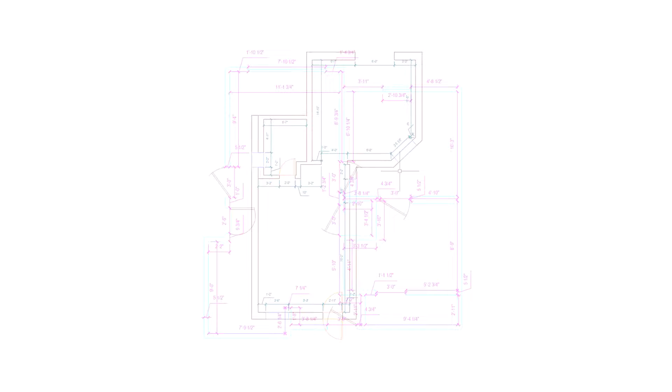Well, for those of you who didn't stick around, Class 8 started out as kind of a mess, with the web being down and me having to go back home for the lecture notes. But we persevered, had a pin-up of assignment 1, and then an abbreviated version of the general topic I was intending to cover, combining things in AutoCAD, followed by a discussion of the objects for assignment 2 and some methods for measuring them.

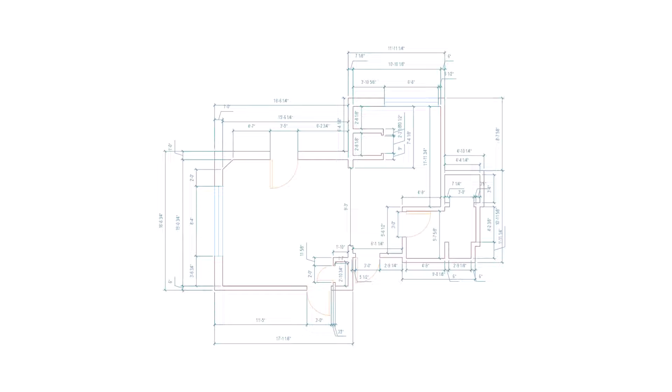First of all, I was truly impressed with everyone's work on the apartment assignment. For what are essentially your very first CAD drawings, these are just great. And my hat is off to Becky and all the hand drafting you guys did for her last year. It shows. In class on Monday, we pinned up both the measured sketches and the resulting CAD drawings in the interest of seeing what we can learn from each other's ways of doing things.

Please don't take my comments in what follows as negative criticism, but as positive suggestions to make the whole measuring, sketching, drafting process even more useful, since you will probably be doing a lot of it in the years to come. To start on a positive note, Katie took the time to label her sketch, which I should have made part of the assignment to be part of your standard operating procedure. In all the professional offices I have worked in, everything to do with a project is kept in a project binder from day one through completion.

And other members of a design team might be consulting your sketches weeks or months later, so it's always good to have your name on them in case people have questions later on, as well as the date, since things might change over the course of a project.

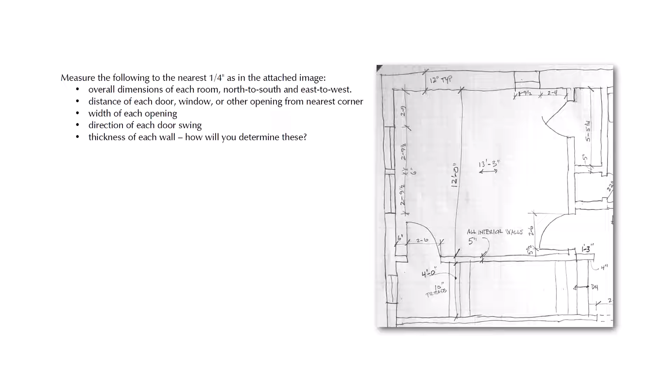As people preparing for a profession, we need what we do to be accurate. You don't want the nurse preparing your injection to mutter, 'Oh heck, that's close enough.' I had asked for dimensional accuracy to the nearest quarter inch, but noted a number of sketches that rounded everything off to the nearest full inch. I can safely say rounded off because I know that not everything in these rooms is built to an integer number of inches. When I see that someone has taken the time to deal with quarter inches, I have more confidence in the whole drawing.

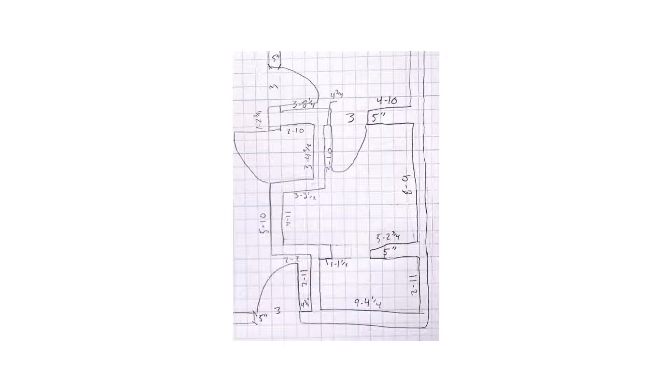Sometimes the fractions really do matter. I'd also ask you to be sure to measure the overall length and width of each room, north to south, east to west, because adding up a lot of individual measurements can introduce a cumulative rounding error. Before I got my laser rangefinder, I'd hook the end of a tape measure under a light switch cover or behind a baseboard or the like to be able to stretch a tape across a room in one go.

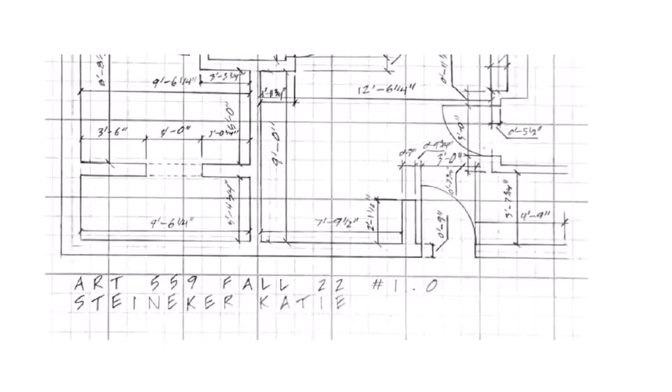Let me approach the delicate topic of tidiness with regards to architectural documentation. We aren't doing life drawing sketches here, where multiple lines might be used to suggest a particular type of contour. These are measured drawings of a built environment, and each line you make represents not only a thing, but a decision about that thing. This is here. To use this sketch again, what and where things are is very clear.

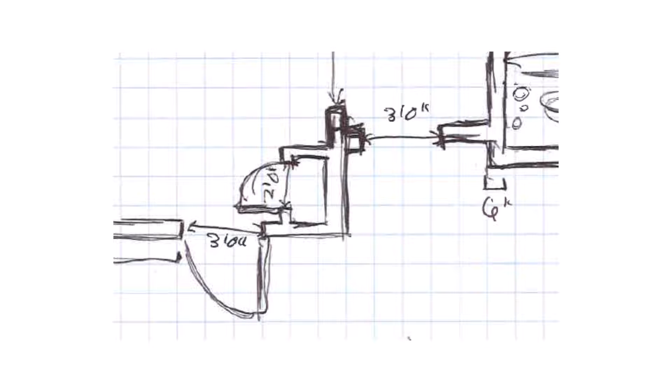By contrast, several of the sketch drawings took a more painterly approach, whose main problem, I think, is that all the extra lines end up obscuring detail, where detail is what we are trying to provide. I suggest we heed a general rule proposed by the graphic designer and educator Edward Tufte: try to present the most information with the least amount of ink.

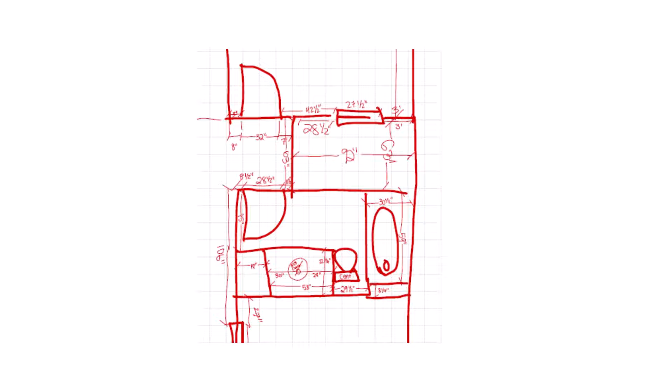The flip side of providing more lines than needed is not providing enough information, especially about the thickness of walls in these sketches. An important consideration because things happen inside walls that we need to be aware of, like ducts and chimneys and plumbing stacks. Not including both sides of a wall also makes it hard to tell which side a given dimension applies to.

There are a number of different ways to combine things in AutoCAD. We're making blocks, which is like a bunch of discrete lines and stuff that are all lumped together and move as one piece. But there are a couple of other ways to do that that might be more useful for different purposes. We looked a little bit at polylines, and I want to show you a bit more, because they have some capabilities that your regular line types do not have, which is they can vary in width.

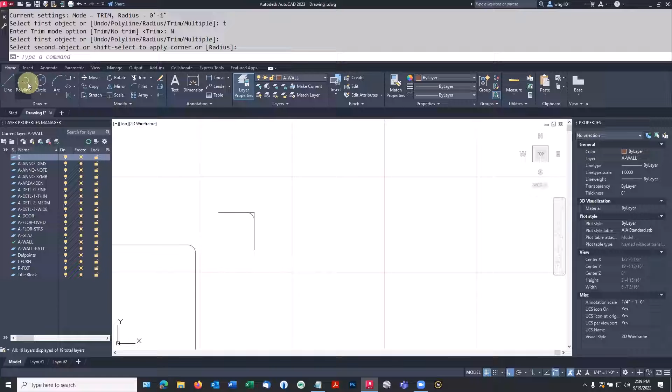So let's review just what a polyline is. We'll go to polyline, and it can either be a series of straight lines, and then that's one thing.

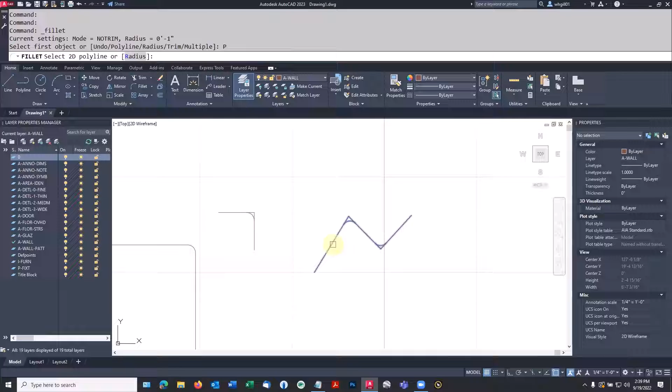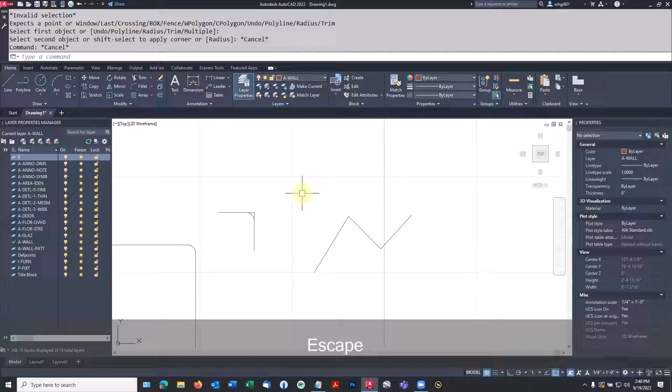Since we were talking about fillet earlier, you can fillet a whole polyline at one time if you want. Pick the fillet command, and one of the fillet command's options is polyline, and our radius is set for 1, then we just pick that. Let's set the trim mode off, fillet, T for trim, N for don't trim it, then P for polyline. Isn't this fun? And then, isn't this an object? Mode is trim, radius is 1, P for polyline, select a 2D polyline, and there it is. Okay.

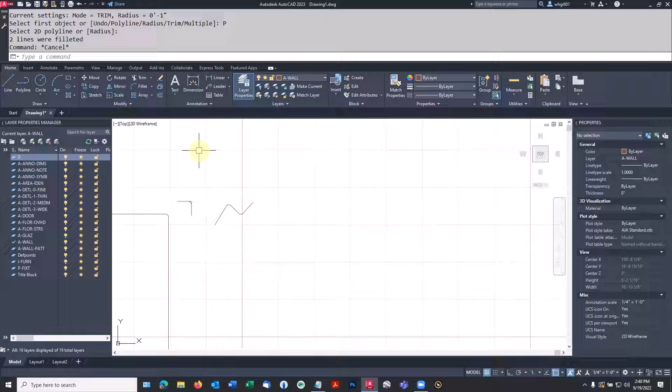You know, if you've roughed out a rectangular swimming pool and you want to round them all off by 4 feet or something, actually, let's just do that because that's something else nice about polylines. PL is the same for polyline.

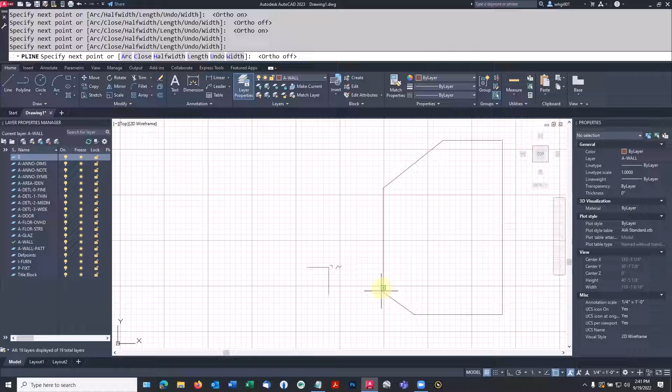Polylines also, when you're drawing them and you get sort of near the end, you don't actually have to bring this up. You can snap to that, or you can just type C for close and it closes itself, finishes that up. So fillet,

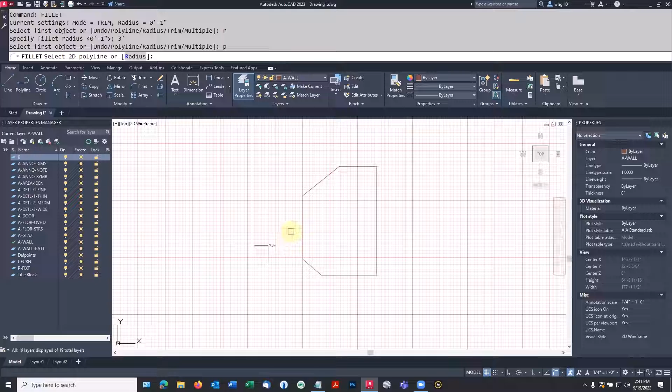Let's set the radius to 3 feet. Set the polyline option and then pick it. So it does them all at 3 feet.

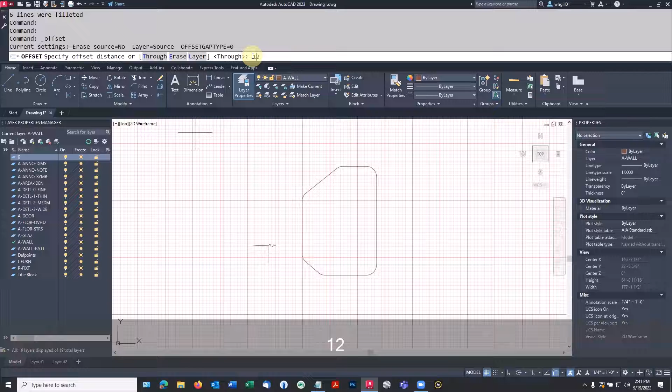Now imagine this was your pool and you need to do, you've got that tile that's 8 inches all the way around it. You can offset a whole polyline at once instead of doing it piece by piece. So if I go to offset distance, that's what it's asking for right here. We'll say a foot. And then you get to choose whether it's to the inside or to the outside, and I'll say to the outside. So instead of having to go pick new fillets and new radiuses and all that kind of stuff, you just do that all at one time.

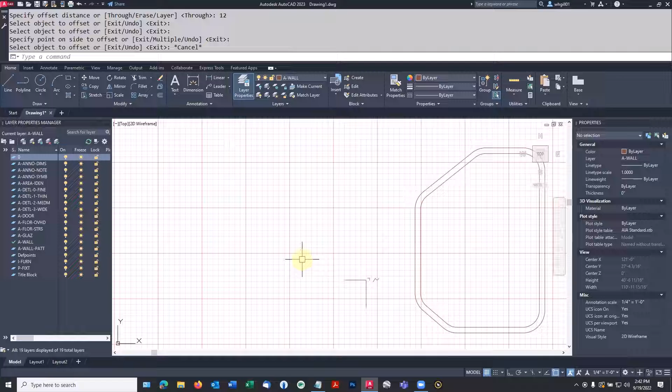So another cool thing about polylines, lines on the screen, just lines, are always going to be this skinny thing. No matter how much you zoom in on them, they're just always the same thickness.

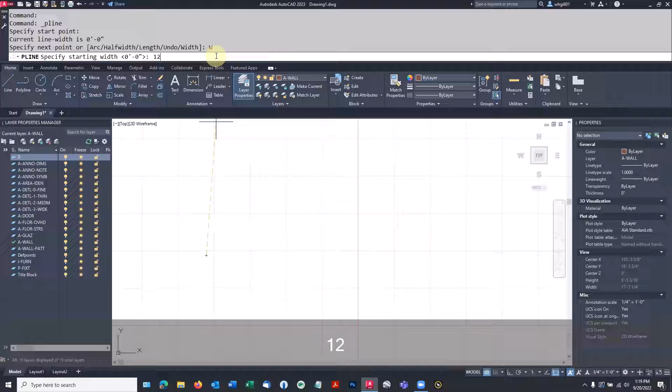Polylines, and this gets into more of a graphic design sort of a deal, each line or arc segment of a polyline can have its own width as well. We'll make this one have a uniform width of 12 inches. And that'll plot that width, and it's good for title block edges and that kind of stuff that you don't want to have to set up a whole new layer with a width for it. It's just going to plot that way.

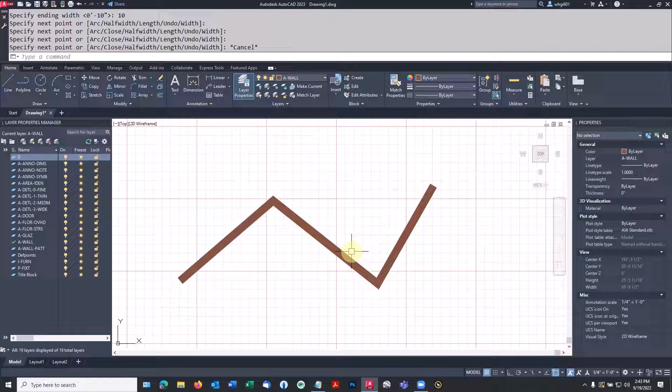Polyline segments can also vary in width as they go. So polyline, I'll make my width be, let's make it wider, let's make it be 20 to start with, and 10 to end with. So now I get something like that going on.

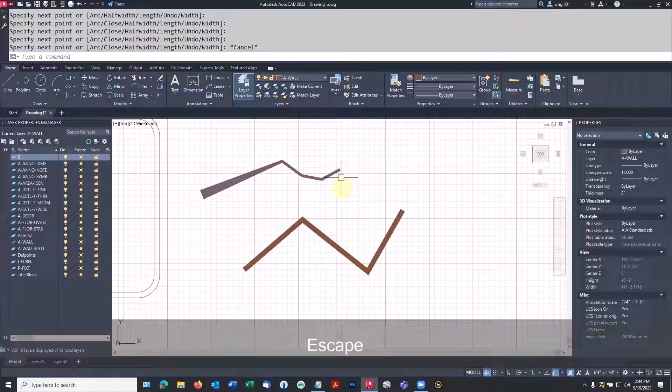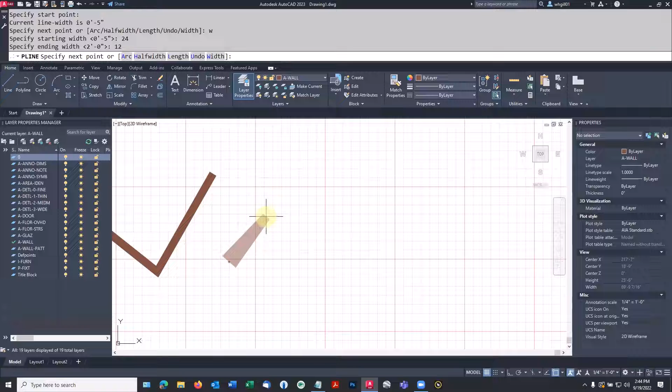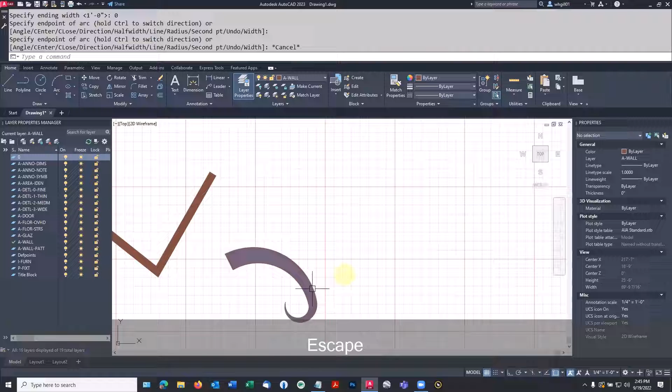And if you combine this with straight line segments and curved line segments, you could do PL. Let's do width. I'm going to make the width be 24 and the ending width be 12. And I'm going to draw an arc with that, A for arc. 24 to 12. And then the next little piece of arc, I'm going to make its width start at 12 and end at 0. So we get a little guy like that going on. So there's options there that you can do with one object that otherwise you might have to draw some perimeters and then apply a hatch to the inside.

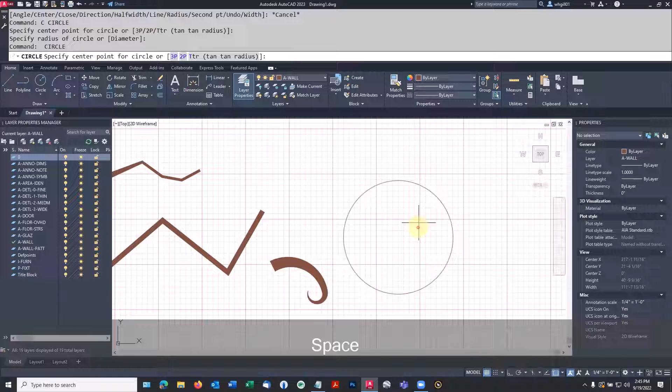So polylines, a couple of ways here to create polylines that I've listed. I'm going to skip most of those, except for some reason you would like to keep all these guys, but also have the polyline that shows that interior space. That's the boundary or bpoly command. BO is the shortcut. Okay.

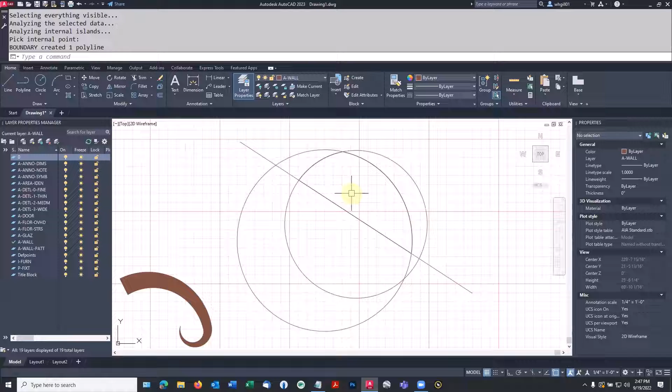And sometimes it's hard to pick something you've just created. If I'm going over here, it might be picking one of these circles instead. But if you remember from when we were talking about selecting things, you can always select the most recently created thing, the last thing made, by typing L for last when it asks you to select something. So you can do move, and then L for last, enter. I'm done with those.

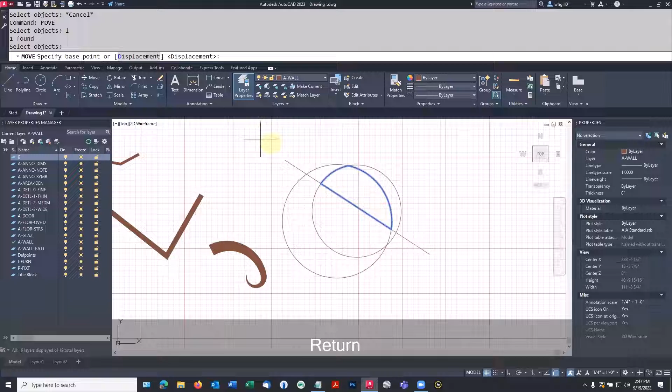And then that comes all by itself without having to trim those down or anything like that.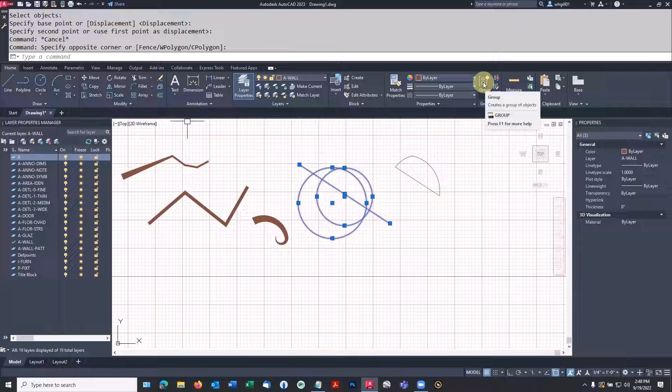The next way to combine things together, usually on a temporary basis, is called groups. Let's say I wanted these three things right here to always just move around together. It's just a design element, not anything I want to save to put in another drawing. We can select them ahead of time and then do Group over here. I'm not sure where it is on the Mac, but the command is Group. Now these guys travel as one, and they copy as one.

Unlike blocks, which when you modify one version of one, they all update, which is very handy, groups are made so that you can move things around inside them. If these were chairs around a table and you wanted to vary them a little bit, over here in group...

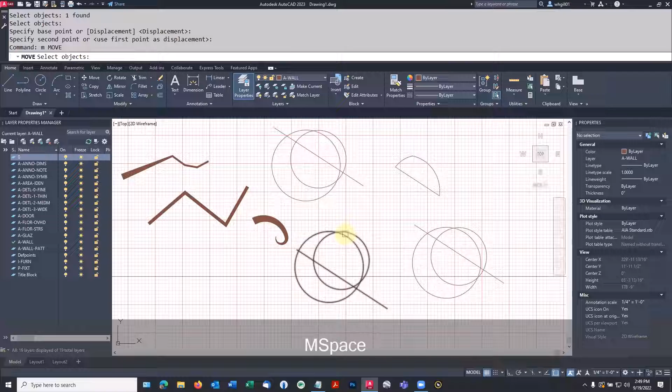Right now, if I pick this group, the whole thing moves. If we turn that off, group selection on or off, so that it's not highlighted, then we can move an individual object around. And then if we turn group selection back on, then they can move together again. It's a slightly different way to address dealing with multiple things that you don't want to have to pick each time. There might be 40 of them. You just make them a group and move them all at once.

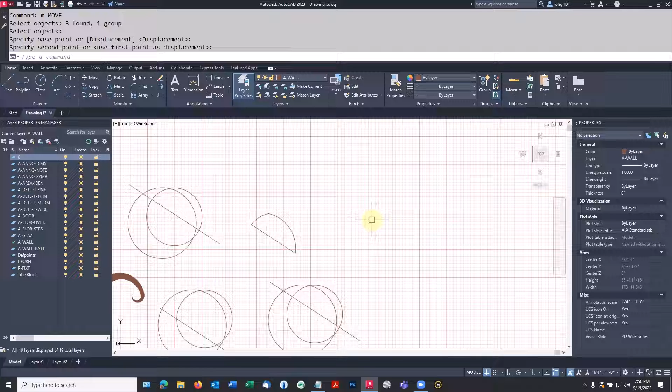The basic process for creating blocks is just not that big a deal. Here's what we do. I'm going to make some simple shape, and I'm going to call this a planter or something like that.

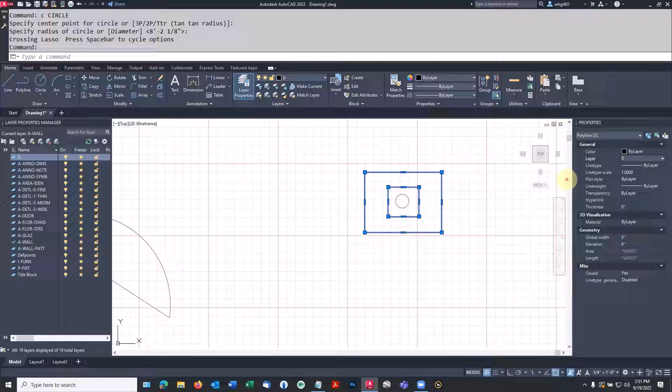These are objects that I've drawn. I'm going to put them all on layer 0 - we'll get to that later on, but it's good operating procedure to put anything that you want on a block in layer 0 before you turn it into a block. What we're going to do is take these three objects, store them as one with a name, so we can recall it by name when we're putting it into our drawing. We can save it out as a separate drawing file and insert it into other CAD drawings. It could be an airplane, it could be an atom, doesn't matter how big it is.

So a couple of decisions we need to make: we need to give it a name, which I'm going to call planter. We need to give what's called its insertion point - as we're moving this around, dragging around the screen to place it, do we want the cursor to be here? That's one insertion point. It could be here, or here. What makes sense? The important thing is that it's not arbitrary and not off in space somewhere. Let's pick the center of the circle, assuming they're all lined up.

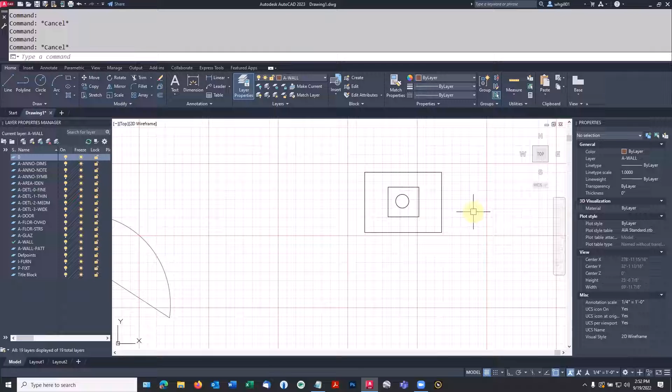So to create a block, you type the word block. It's the easiest way. The first thing, we've got to give it a name. Blocks are named things. When we save it out to a drawing, if we call this planter, we'll have a new file called planter.dwg.

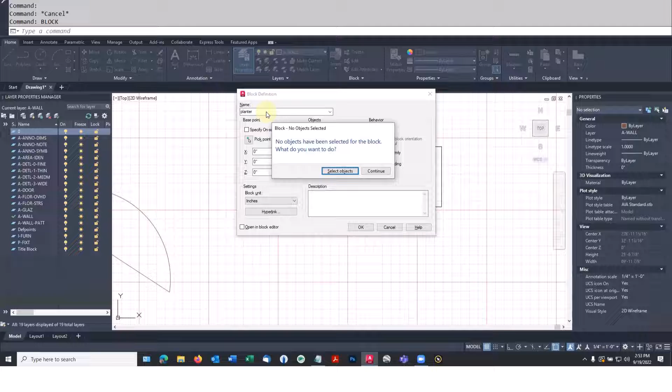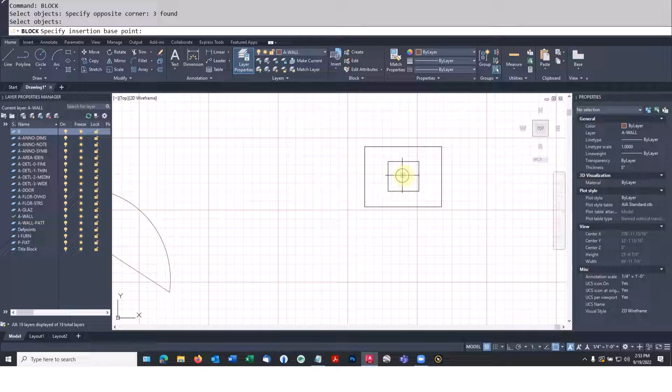And then it'll say select the objects, if you haven't already. I'll just put my box around those - I could be picking other stuff, but I have to hit enter to let AutoCAD know I'm done with that. Then I'm going to pick the point I want our insertion point to be - it's called the base point of the block. I'll snap to the center of that circle. I've got my center snaps turned on. So there's my center, and I think that's all we really need to do.

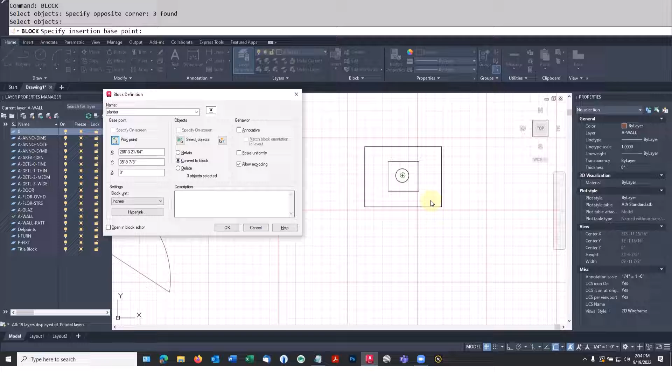One little last question is, do I want to take these guys right here, the ones drawn on the screen, and convert them into a block while I'm doing it? I'll say yes, and we say okay. So there this is - it's a block reference, and its name is planter down here.

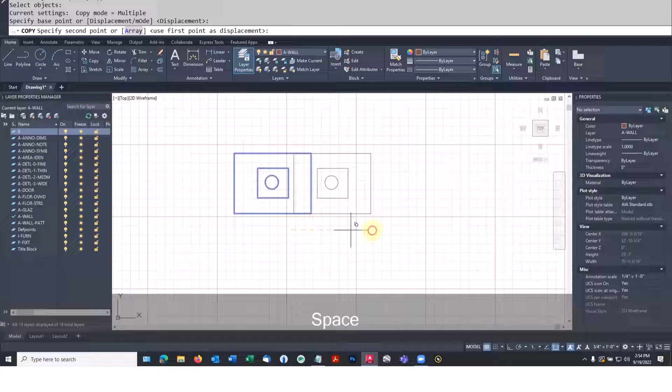So we can put those in an array, or copy them, or something like that. A lot of times with something that's going to be a standard element, you start out with a fairly simple version of it, and then as the drawing refines, you maybe do it in more detail - maybe add text, maybe add some more line work.

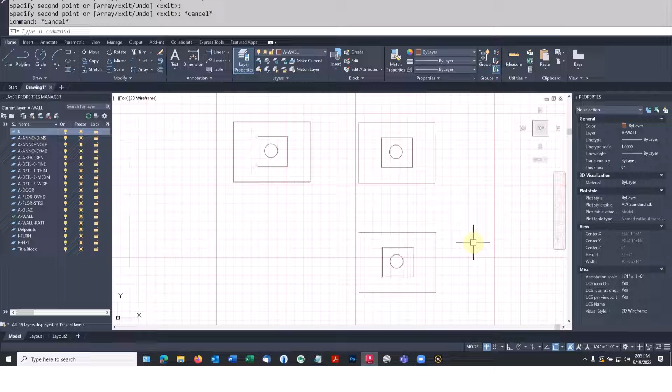So this is over on page 3. A couple of ways to redefine a block - editing blocks, actually this is on page 4. The easiest way to do it is to select one of them, right-click, and go to Block Editor. This is its own little mini editor where we won't see the other stuff. And there it is - so this is like our block, and I'm just going to add some lines.

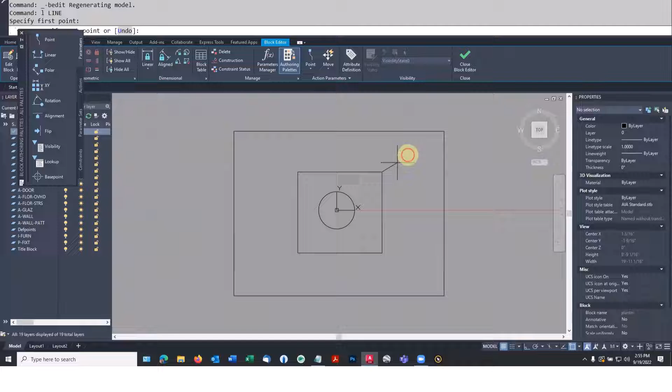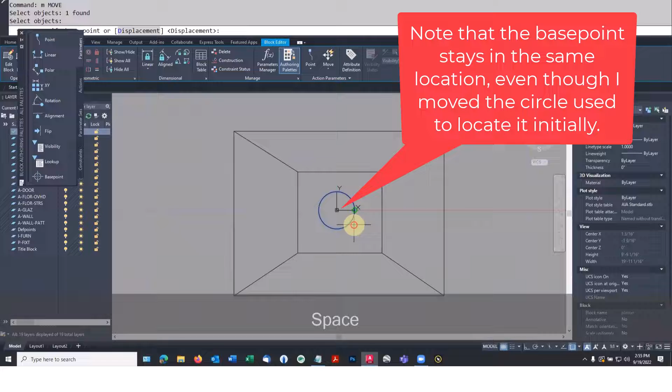And I'm going to move this circle down here. And then when I'm done, I just check the green check mark. Okay, close block editor, save the changes to planter. All those instances of the block have been changed. There's just one definition for planter in any one drawing.

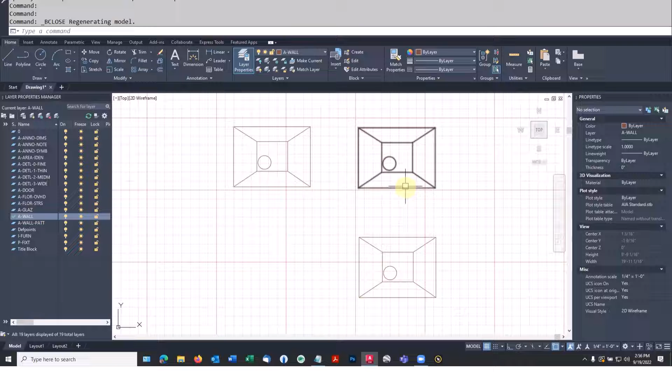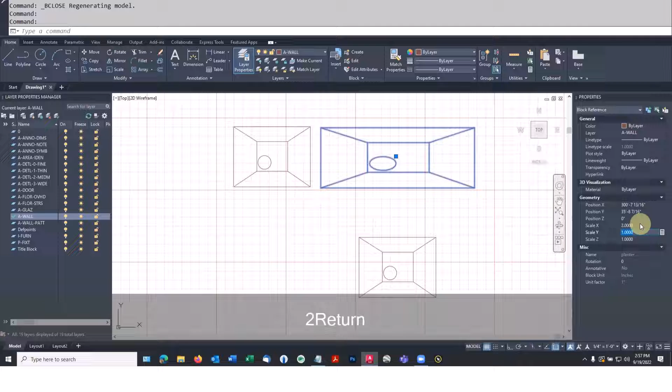Let's say we need a long planter and a short planter. Any individual instance of a block can have different scaling factors in the X and Y direction. So if we want to make this twice as long, this is the X direction going this way, as you can see down here. Double the length we get, I'm just going to say, make the X factor be 2. So you notice the insertion point stayed in the right place, it expanded around that point. It also turned our circle into an ellipse as that stretched, which might or might not be appropriate to your use.

If you wanted to keep doing this a lot, maybe you just make these guys a group instead, copy them from place to place, and then stretch one end, leaving the circle as a circle in its current location. So that's one of the drawbacks of blocks, is that when you scale them, everything in them scales the same amount.

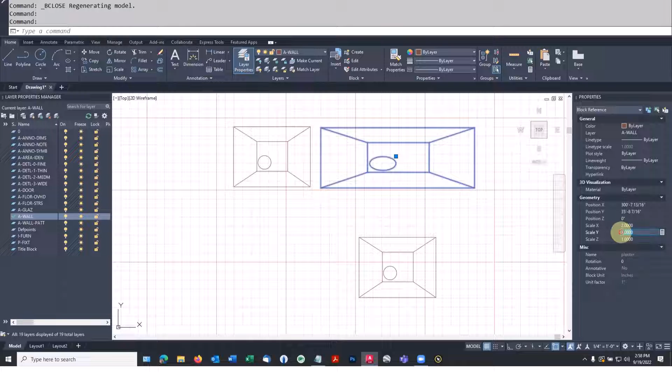If we take this back up to make the Y also be 2, then we get something that's twice as big and back to being a circle again. So some blocks are made to be stretched.

Others, and I picked the example of like a range that has a very fixed size. You don't want to be increasing that by an inch. It's not going to fit into the slot. A football field, that's a fixed size.

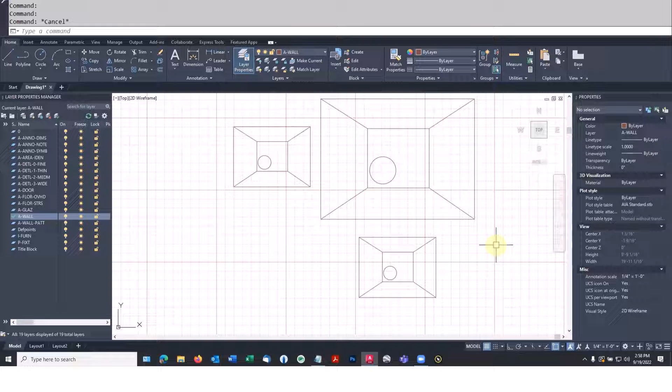Some, however, are made to be scaled. A case in point might be where we make a door, a little teeny tiny door that's 1 inch by 1 inch, and this is maybe a 32nd of an inch wide, something like that. Then we can place that. And if we want a 36-inch door, we just change the scaling factors to 36 and 36, and it's automatically the right size. So 1 block instead of 1 for each door size.

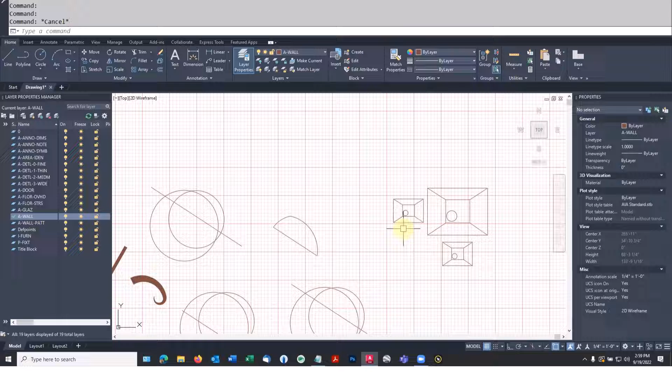We can also, worst comes to worst, explode a block. Let's say I want this one to be—I want to keep the height the same, the circle in the same place, still be a circle, but I would like to have this be much longer this way. I just basically want to stretch this end of it down a ways. But blocks can't be stretched.

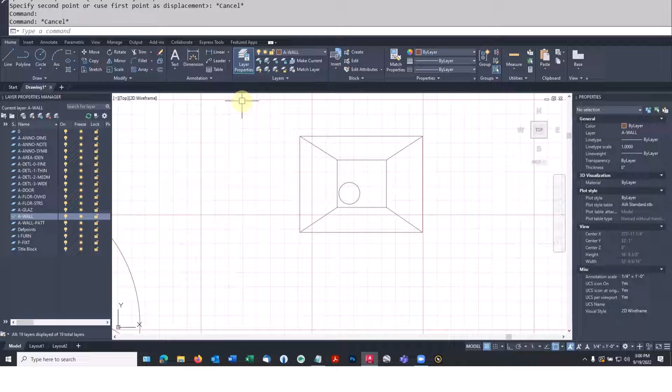So for this, we need to explode that block back into its component pieces, which is this tool right here. You can type explode, or just pick it, hit enter, hit enter. You're out, and now this is individual stuff, and we can stretch this to be this thing that we want. It's no longer a block, it's no longer a planter, it's just some extra lines there. We could make that another block and call it planter 2, or long planter, or something along those lines. But for right now, exploding is the easiest way to go.

Lastly, we've made this amazing planter here, and I would like to share that with another drawing. Actually, I want to send it to somebody on the internet, on email, so they can use it in their drawing. To do that, we write it out to my desktop as a separate little AutoCAD file, and it'll be called like planter.dwg, and I can insert that into any other drawing.

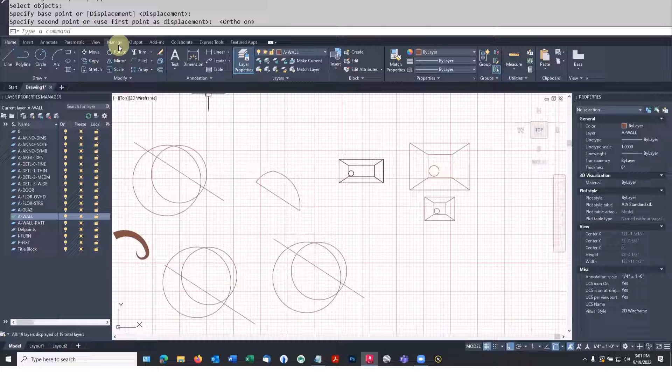Here's how that all works. So this is at the very end of page 4. That's the WBLOCK command for write block, WBLOCK. And since it's a block I've already made, I can say select the block. We'll pick that one called planter.

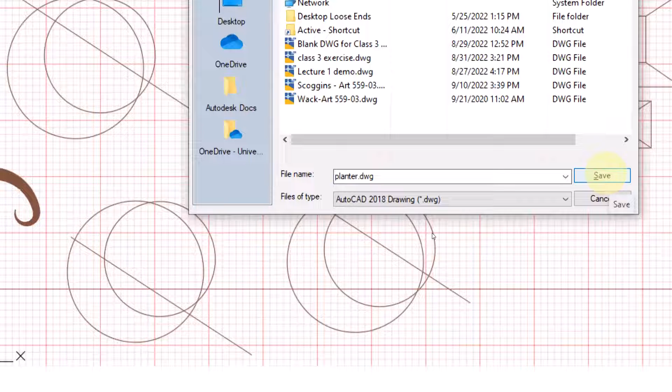And where do I want to put that? Well, I'm going to stick this on my desktop for right now. Planter.dwg. I could give it a new name here, but that's very confusing, so let's not. Scroll up. It will inherit the base point that we did right here in the center of it. So we can just say OK. And that creates a new file on our desktop.

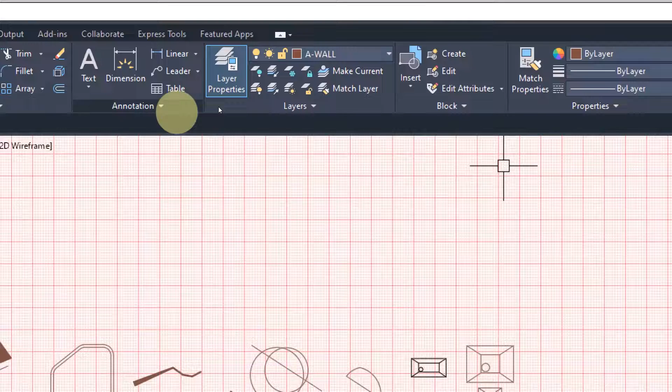So if I go to open, if I go to get Jasmine's drawing here, and I want to insert my planter into her drawing—it's its own, such an important feature. It's right here after home, which is insert.

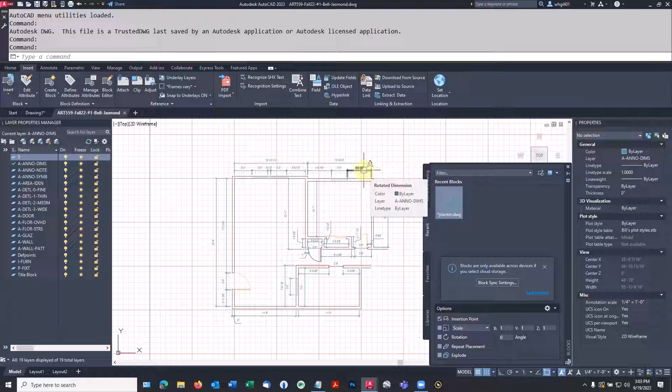This is all too small for me to see. AutoCAD's sort of keeping track of the previous ones I made, but I really would like to navigate to the desktop. I'll figure out how to do that here. But I'll pick planter, and then we can drag this planter into her living room. It appears it's a little large, so we'll scale it.

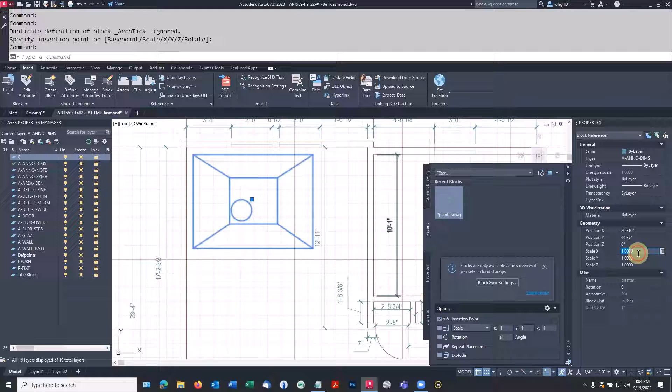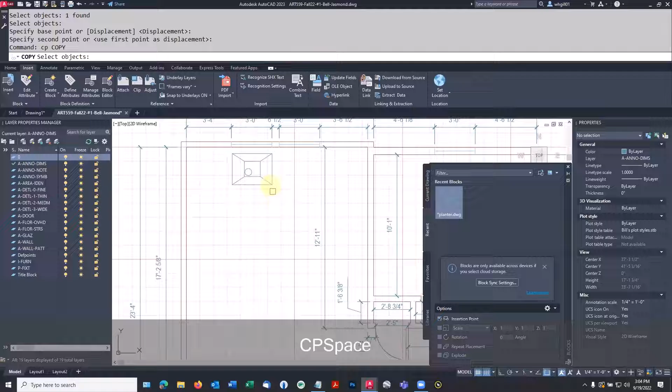Select it. Half as big, a third as big, a quarter as big. Let's say 0.333. Do them both the same. And then it's still centered around that same base point, and we can stick it up into her. We'll do it in front of the window. Yeah. Copy. One in front of both windows.

So what's a little confusing with this is that you can insert a planter into a house plan. You can also insert a house plan into a planter. They're all just DWG files, and they can mix and match any way you want. I don't think I've actually done it, but you can insert a 747 into a garage. You just need to make the garage bigger, but the size of them has nothing to do with each other.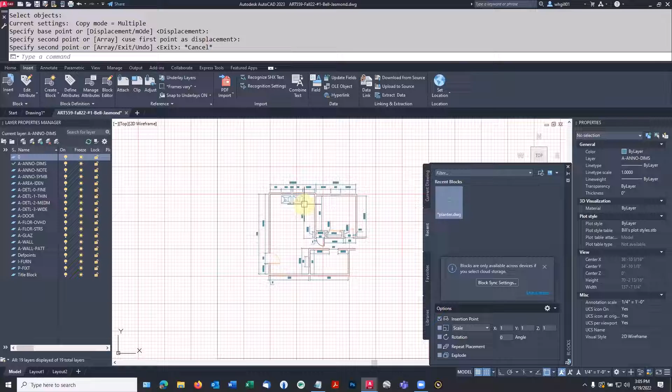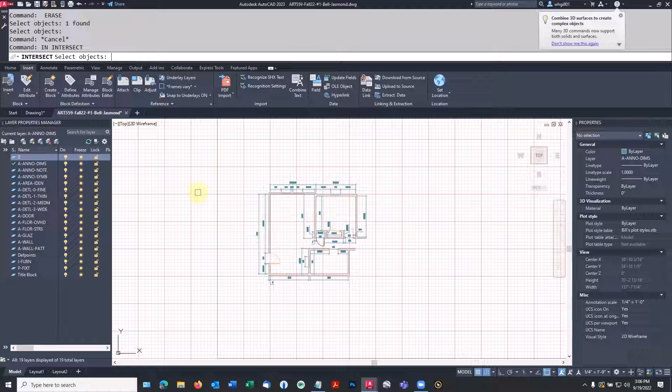And this is saved in this file. Even if I erase these and save it again and reopen it, the idea of that drawing of the planter is still in this file's internal library of blocks. So if I go to insert, and we say current drawing, we see there's the planter, and I can bring it back in. If you get lots of blocks in a drawing that you don't want, you can erase them all and then purge them, and that gets them out of this file's own memory.

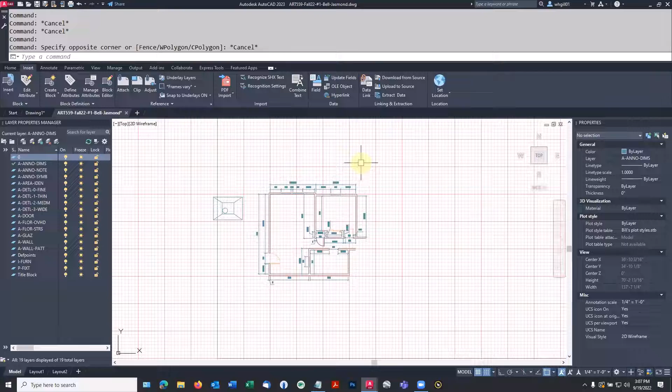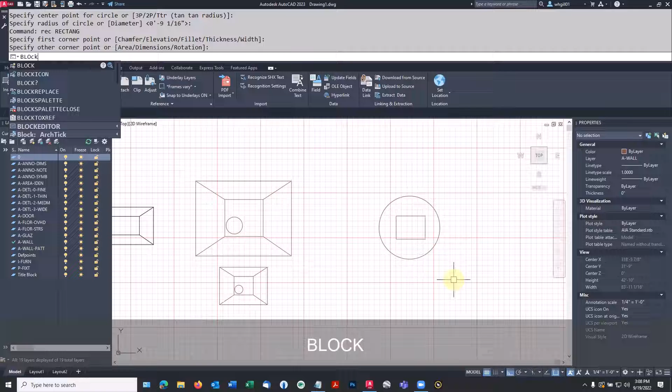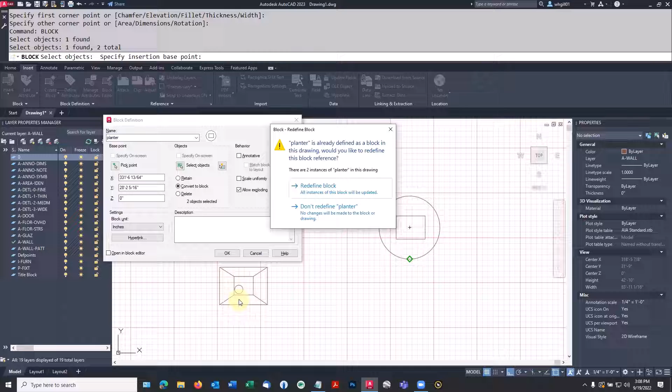Now, something you need to be careful with is, let's say I was busy drawing things, and I drew this sort of new kind of planter, and I decide to call this right here planter. Planter, select objects. We'll pick a base point. Okay. It says, we already have a planter block here. Do you really want to redefine every instance of where we have it with this new thing? Your old one is replaced. So let's say, yeah, redefine it.

And they're all redefined. This is the new planter, and there can only be one planter in each drawing at each time. Back in whichever drawing I was just working in, that's still the old planter. This is the new one.

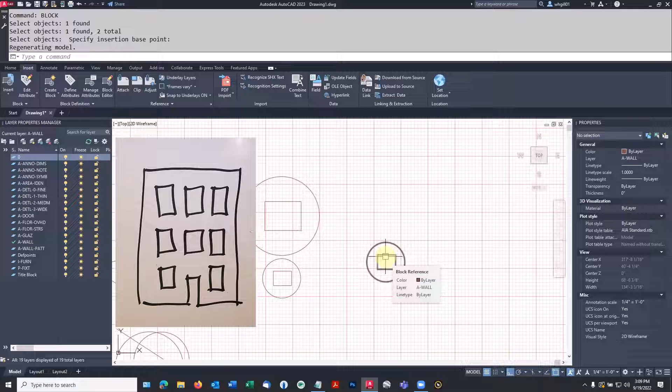Now, where that's very handy, let's say you're doing a building elevation, and we knew we wanted this many windows, but we didn't know anything about them. So we make a block called window 1, and it's just a rectangle with this base point down here, and we draw it. We got the spacing right, the numbers right, they're in the right places in plan. Then the owner says it would be better with an arched top. So we'd redefine the block with an arched top, and they all get arched tops just like that. Then I want mullions all the way down, and they all get mullions. You just keep updating that.

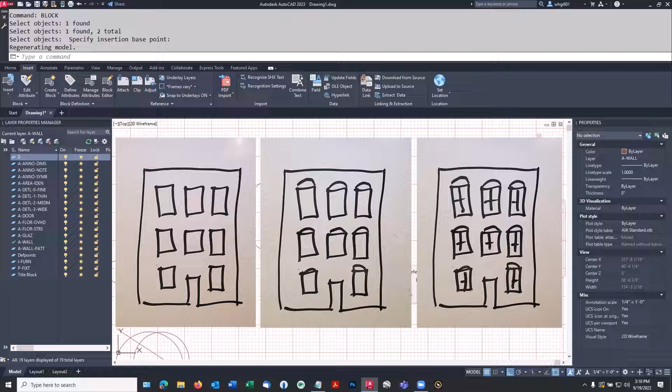That's actually probably better done with the block editor, so that the base point stays in the same place, and you're starting with dimensions that you're just tweaking. But if you want to completely redefine it, you can use the redefine block to do that. It used to be there wasn't a block editor. Exploding something, tweaking it, and making the block again was the only way to do it. But the block editor is really a preferable tool because you start with all the geometry you've already worked on.

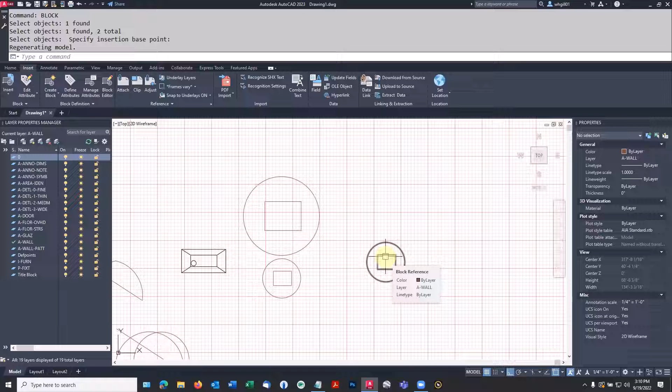Let's just stop my talk now and start answering any questions you have about the blocks assignment, or we can go home and take a nap. So what are you going to draw? What are your blocks going to be? Okay, aerial view of a pumpkin would be fun.

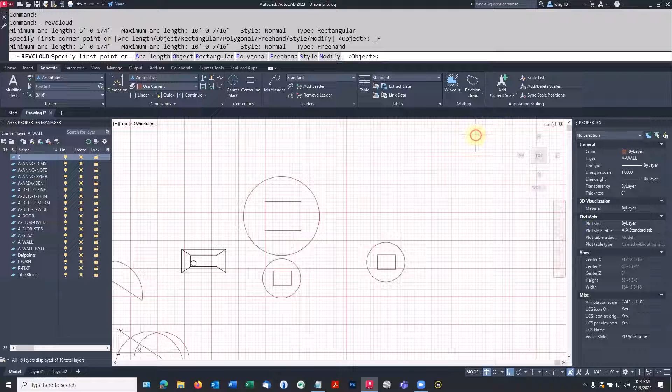You want me to show you something fun? Revision cloud. You should have this on the Mac. Let's just say freehand. And what you might do is draw a circle and then just follow around the circle to get it like that, and then do whatever you want.